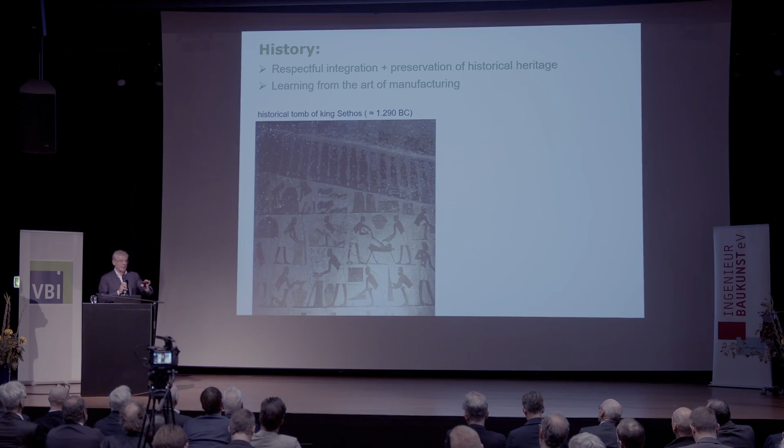We really tried to study carefully this procedure, how they made the different mixtures of mortars and so on, and what had been added, in order to understand a little bit better a possible restoration procedure.

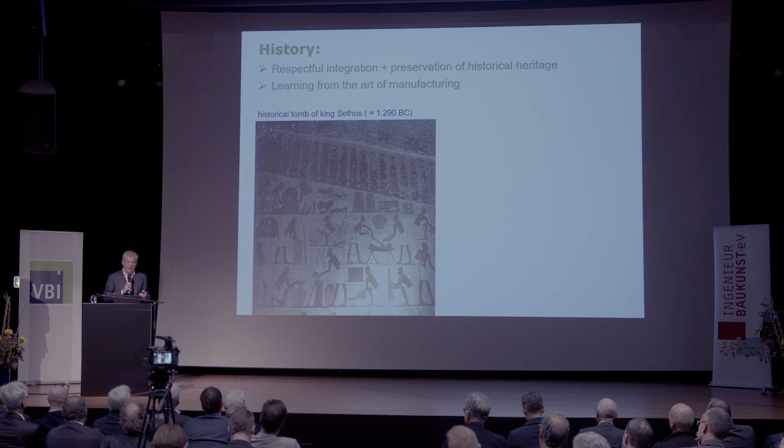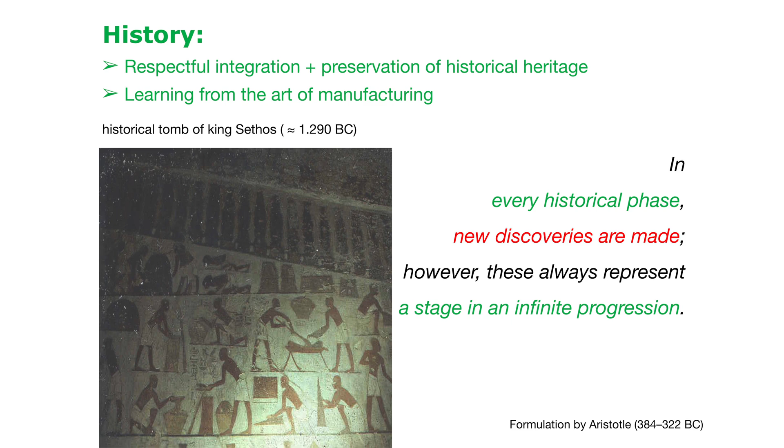Learning from history brings me to the formulation of Aristotle, one of my favorite philosophers. He said, in every historical phase, new discoveries are made, but however, all the time, it is a stage in an infinite progression. So we have only to believe that also the young generation will progress very well, and they will do very well. This brings me to the situation where we should go.

This image I got from Reinhold Messner, where we had the chance to design the huge glass roof on his castle years ago. The idea that stays behind all of this is that we have to keep going.

Trying to integrate also the historical, not only knowledge, but also experiences. I would like to point out what actually the president this morning, Professor Markus Hilgert, said, when he announced the so-called Lucius Fabricius Bridge in Roma. This very interesting bridge has a nice story behind it.

We call that bridge in Italy not Fabricius Bridge, but the bridge of the four heads, 'i quattro capi'. The story behind it is the following: in the 16th century, the bridge was in a very bad shape, and so they called some experts. In the literature you can read that they were architects, but I believe there were probably also engineers - four experts. And the four experts developed, by their own, four individual solutions, and they couldn't find any common solution in order to maintain the bridge.

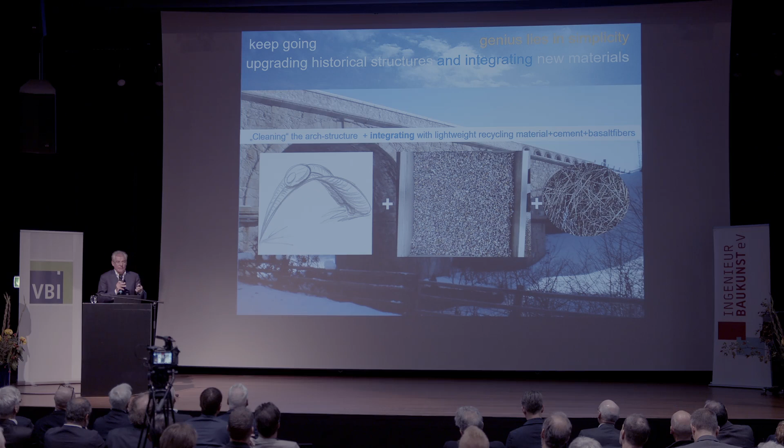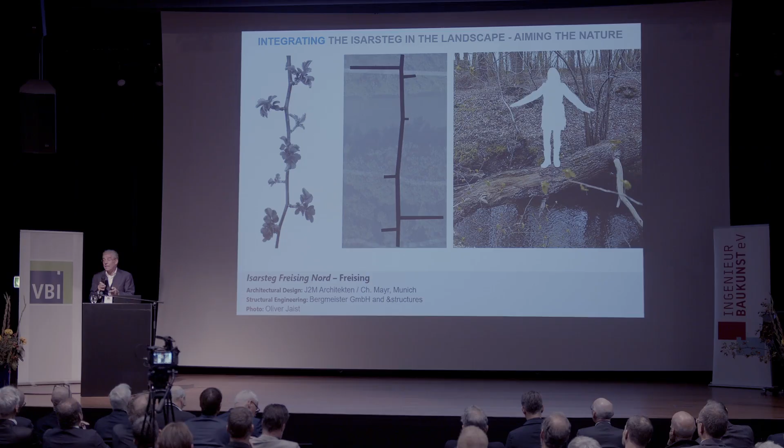Integrating our bridges and footbridges in the landscape is not only a scope, it is also sometimes a very interesting communication skill and task. We as engineers have to serve sometimes in a very modest way, as a modest servant, but on the other hand side, we must also be the enabler of very interesting ideas coming from designers, from architects.

This kind of footbridge was actually developed with the idea to create some organic element, and to shape that in a way that finally it turns out to be an integral bridge.

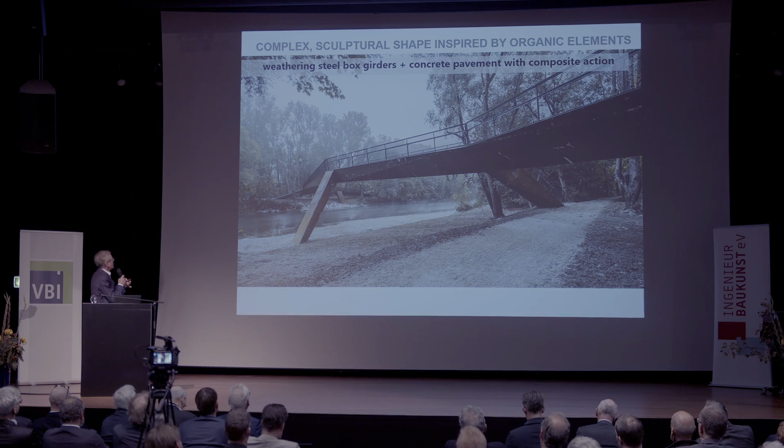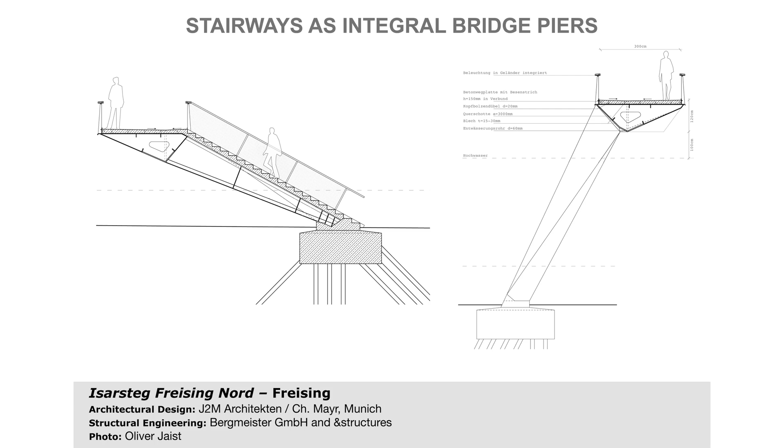We have been using the weathering steel box girder. The concrete pavement has been directly connected with headed studs to the steel structures, in order to have a structure which is quite simple in design, but nicely integrated in the landscape. The stairways have also been used as integral piers in order to activate the foundation.

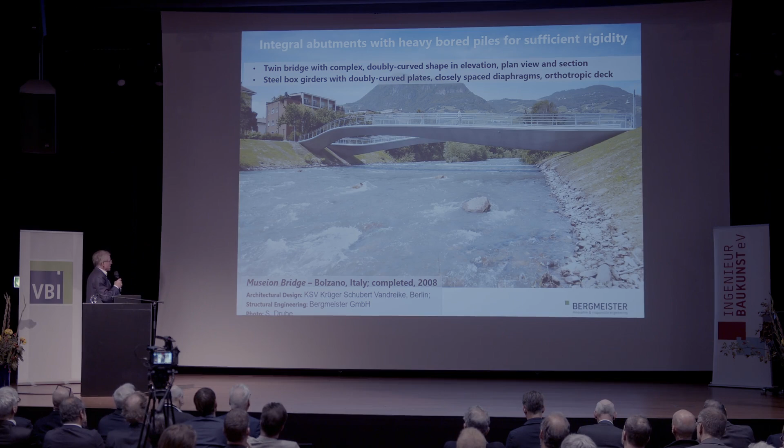Another example is the footbridge, bicycle bridge, designed by Krüger, Schubert, Vandreike from Berlin 15 years ago. This bridge connects two pieces of the city of Bolzano-Bozen: on one side the university, on the other some residential zones. So the idea behind was to create a nicely shaped bridge.

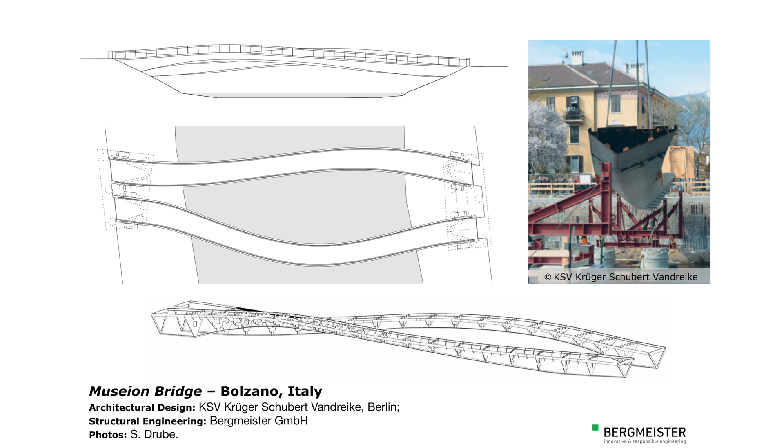Made out of steel box girders, we tried to integrate the soil into the structural behavior, developing an integral bridge which has a very interesting structural behavior. The situation with such a bridge is we always have to achieve a certain perfection by reducing as much as possible the volume, the masses, and additional joints and bearings.

By doing so, we designed a couple of years ago this Herzogsteg in the southern part of Germany. I would like to underline one very important task: the close collaboration with architects. We need them, and we have to find ways to work together in order to integrate the landscape and develop a bridge structure with very little maintenance.

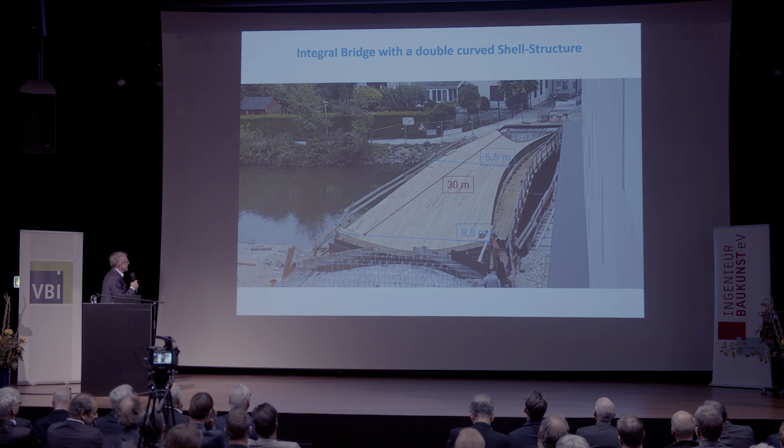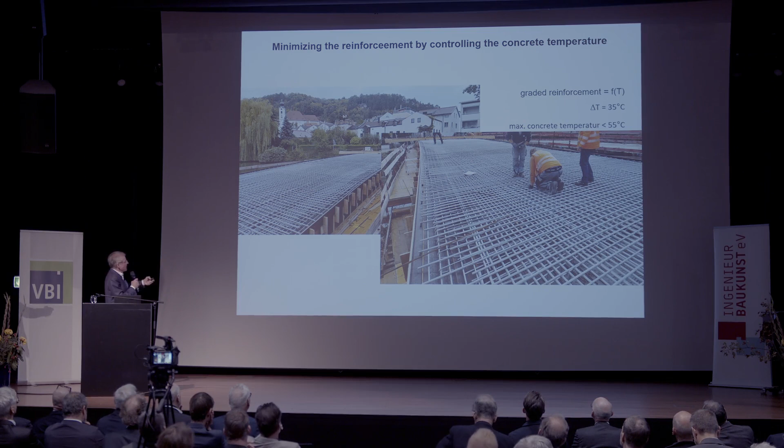This has already been pointed out, and the idea was to use a double curved shell structure, as Mike was pointing out yesterday in his presentation. We tried to minimize the reinforcement by controlling the concrete temperature. This sounds easy, but it's not an easy task when you really apply it by limiting the temperature difference.

We used some emission-low binder, and had to take into account the slower hardening, which influenced the construction process. The bridge deck has no additional pavement or asphalt. We used a deep hydrophobization promoted by the office Schiessl-Pecka, Sodeikat, Gehlen from Munich.

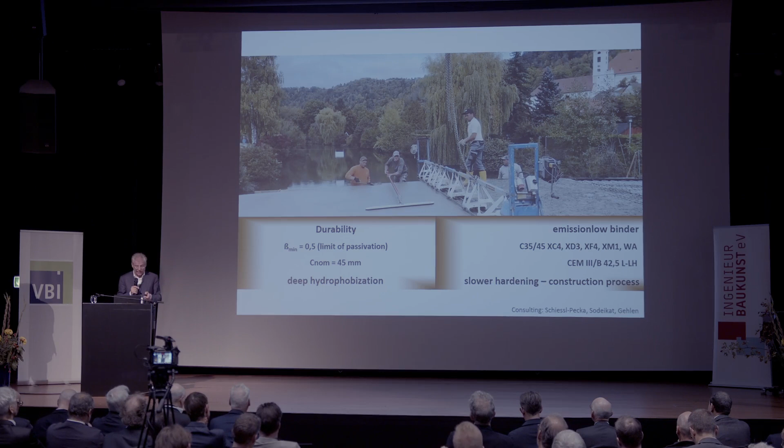This is an example of how, in a simple way, such an integral bridge can be inserted within the landscape, and on the other hand how simple it is to finally maintain this kind of bridge. The passive earth pressure also has to be taken into account, as shown in the following formula.

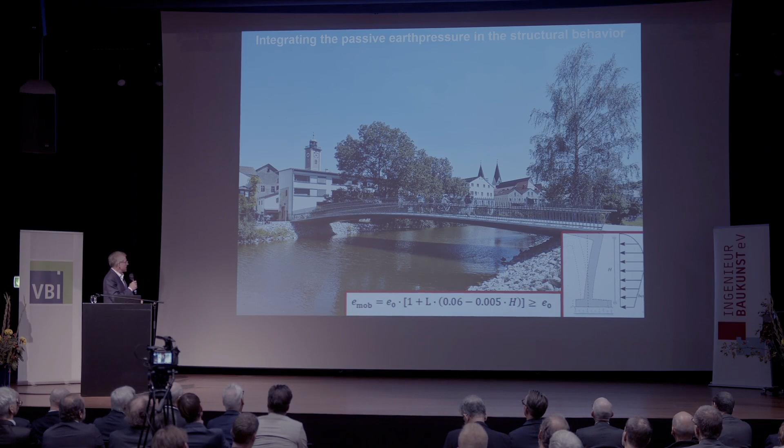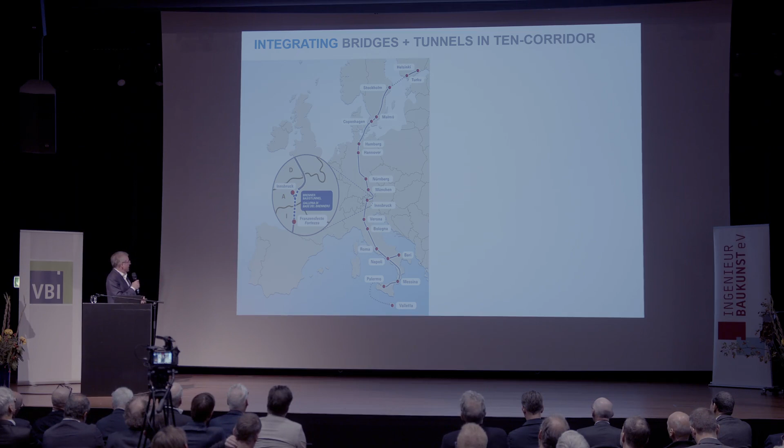I would like to come up with two more, slightly bigger projects. I was heavily involved in the past two decades in the so-called Trans-European Corridor from Helsinki to the island of Valletta, a corridor line of 9,000 kilometers. There are several important tunnels and bridges involved within this corridor, for example the Fehmarnbelt Tunnel.

I was personally involved as a member of a commission in the so-called suspension bridge Stretto di Messina, which I would like to mention only briefly, and I was heavily involved in the design, approval, and finally also the execution phase of the Brenner Base Tunnel.

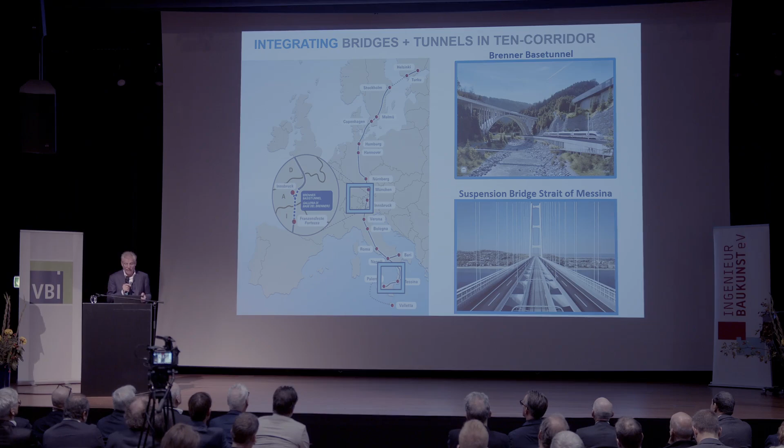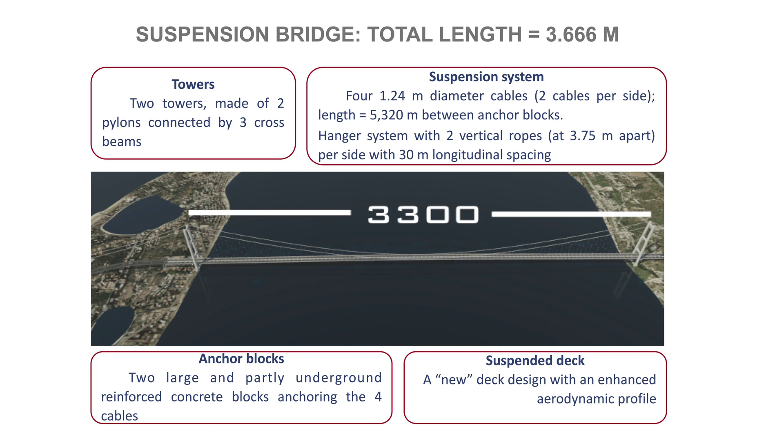Two bigger projects than the footbridges I showed before. This suspension bridge has a total length of 3,600 meters, but the length between the piers is 3,300 meters. We have two pylons connected by three cross beams, plus, as already pointed out, the four main cables with diameters of 124 centimeters, the anchor blocks and the suspended deck.

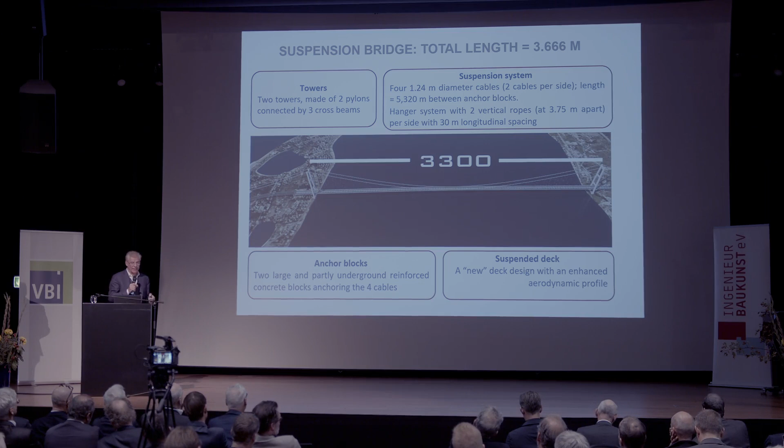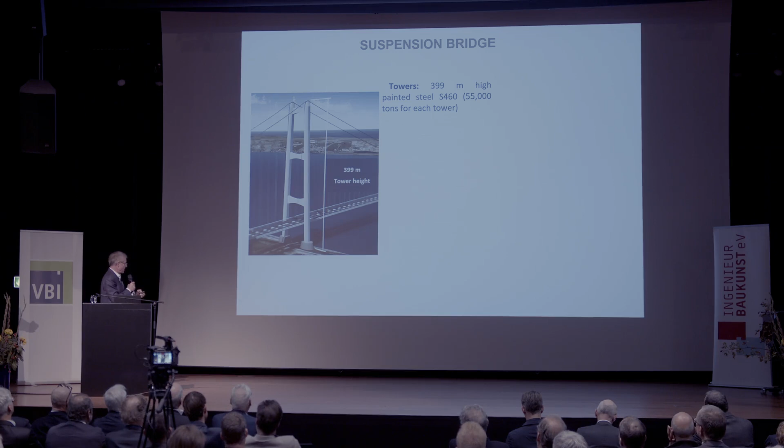There's a new deck design which is still an ongoing task in order to optimize it in terms of wind resistance and so on. The tower is a little lower than 400 meters, since this was a limit given by some code regulation. The foundation is not so difficult.

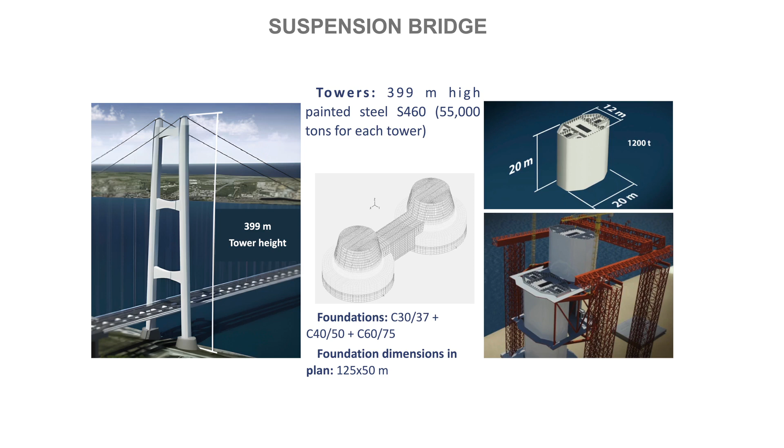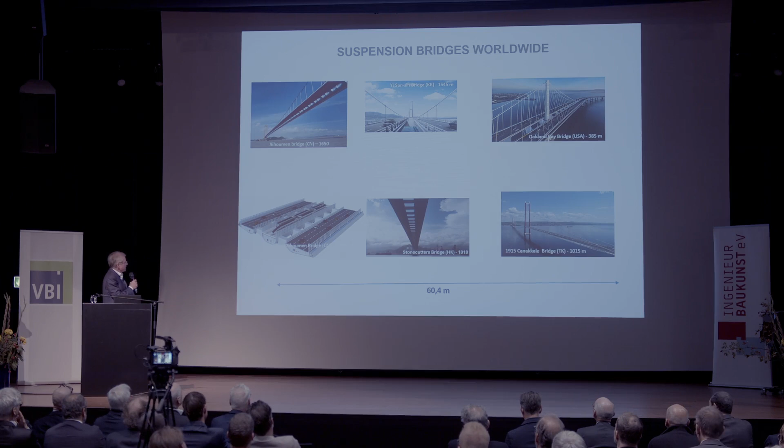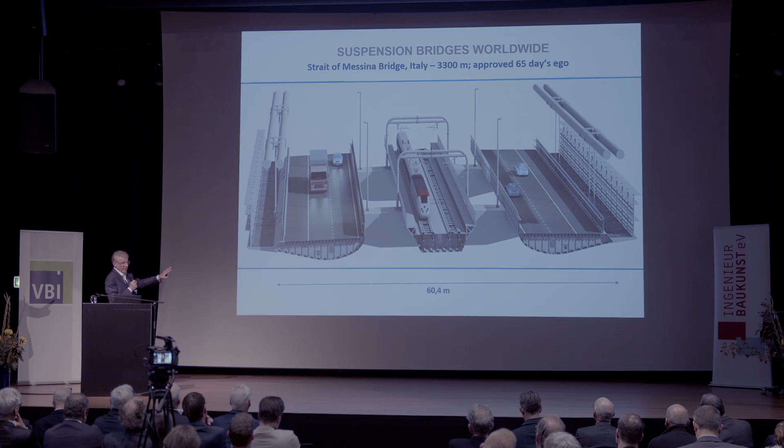The design is done by COWI Consult of Denmark, so different companies are involved in the whole design of this very important bridge. Suspension bridges worldwide are shown in these slides, but the new bridge, approved on the 8th of August, exactly two months ago, has a width of more than 60 meters, containing a railway line and two highway lanes on both sides, which should connect the island of Sicily with the rest of Italy.

The other project was the Brenner Base Tunnel, which should become the world's longest tunnel at 64 kilometers. It connects two countries, Austria and Italy, and both are members of the European Community with the same Eurocode, but nevertheless the complications were quite heavy.

We have 39 kilometers in Austria and 25 in Italy. To tell you one story: we have not been able to shift the highest point of the tunnel's slope in the center, since each country and government wants their own water resources. We have not been able to have the surface water go directly vertically and then split to the south and north.

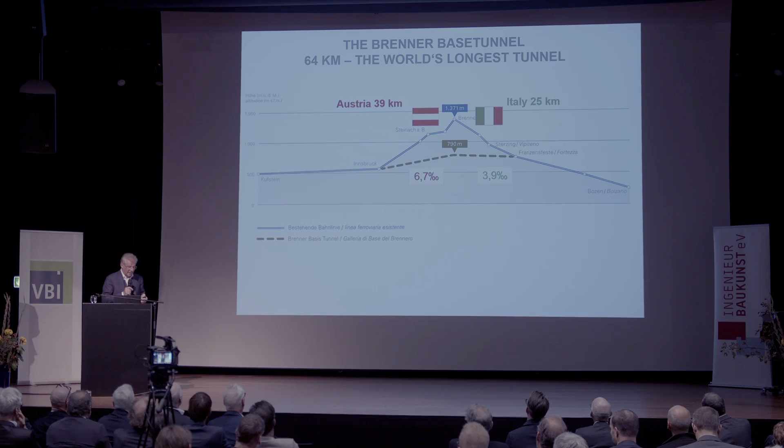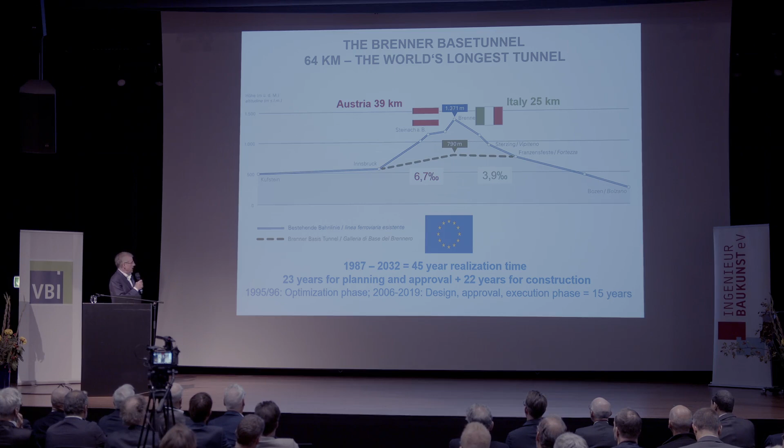We have not been able to change that after a couple of years. The story started in 1987, and I was involved between 1995 and 1996 for the optimization phase, responsible for that, and finally 15 years for the design approval and execution phase for half of the tunnel. 45 years of realization: 23 years for planning and approval, and probably 22 years for construction.

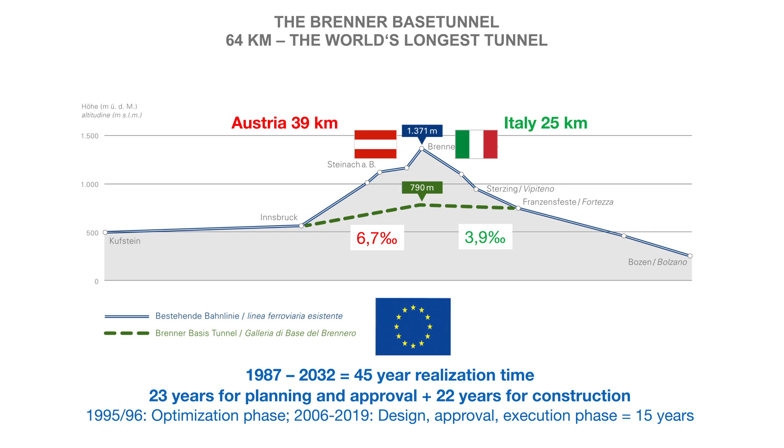This is our reality. Now the tunnel has 3 emergency zones with 3 exits in order to subdivide the tunnel into 3 pieces, none longer than 20 kilometers. These are some emergency constraints.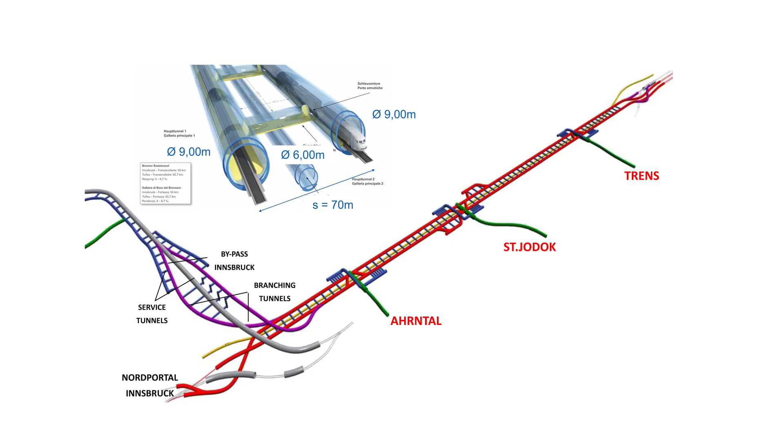There are 2 main tunnels, 9 meters in diameter, and in the middle an exploratory tunnel with a diameter of 6 meters. The exploratory tunnel broke through exactly 3 weeks ago, on the 18th of September, and now we have a continuous situation between the two countries.

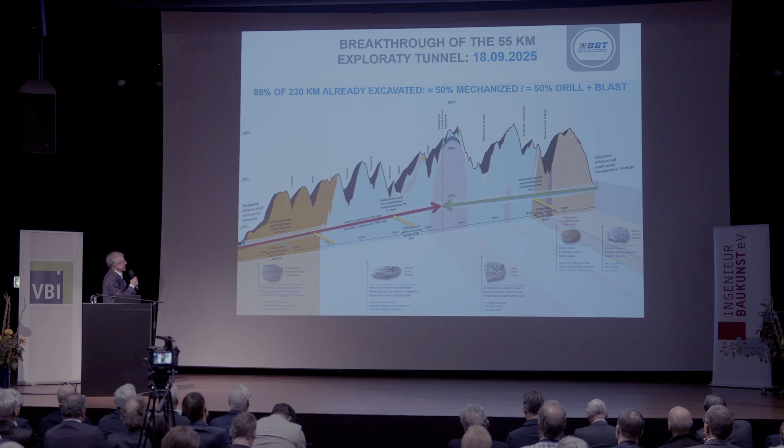50% has been excavated mechanically with TBMs, and 50% using cast-in-place methods with drill and blast, using explosives. This is still an art - how to place the explosives in the right way in order to avoid a lot of overbreaks is not an easy task. It is still a manufacturing task.

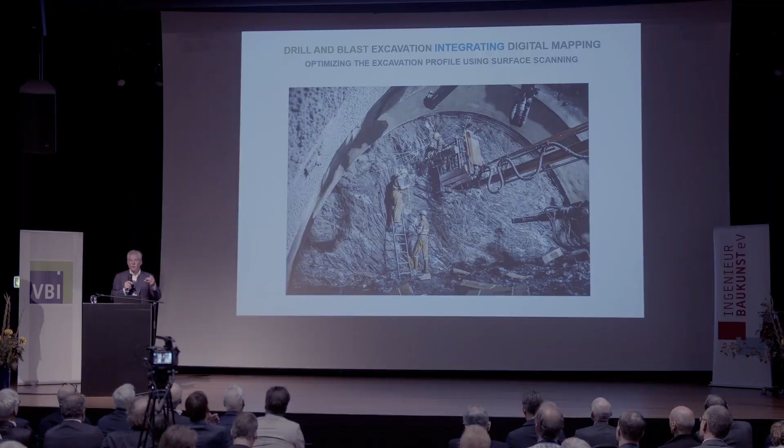On the basis of what I saw there, we tried to develop, using digital scanning, a methodology for how the internal surface could be scanned, and on the basis of historical data and geological information given daily, we developed an algorithm to do the prognosis for the next upcoming 3 to 5 meters, in order to place the explosives in the right way.

What were the steps? First we had the geological documentation and information. We took digital images using laser scans, LiDAR, and mobile camera images. We developed an algorithm using probabilistic analysis and statistics - with enough data we trained the model and found a certain percentage, which allowed us to optimize the drilling scheme based on historical data and the information given by the geologist.

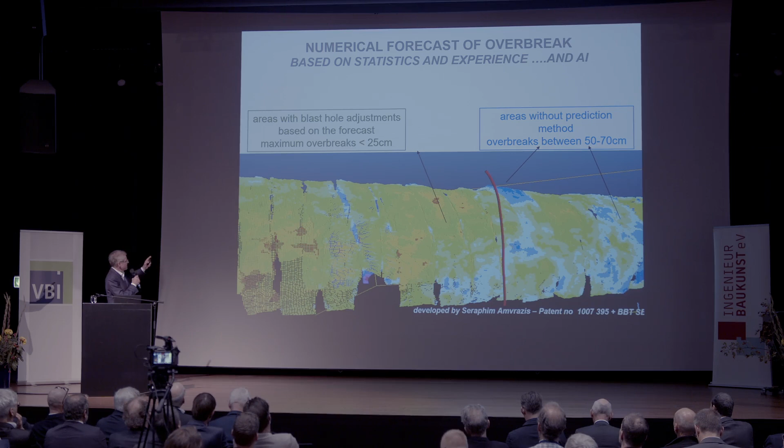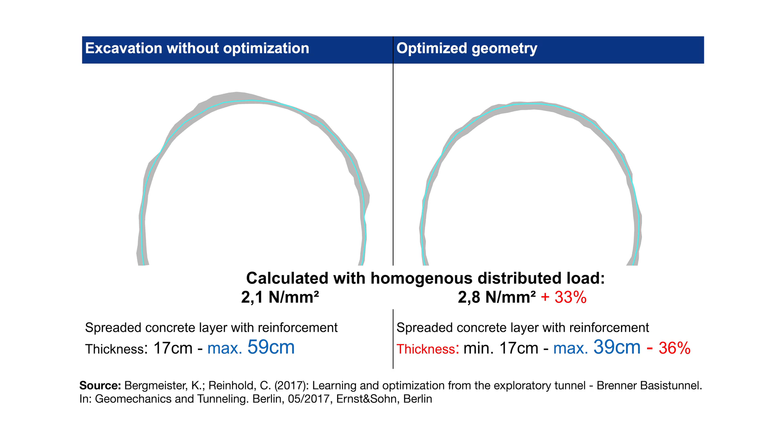The outcome was that we reduced the maximum overbreaks by 65%, which also had a positive impact on the structural behavior - it's a shell structure, nothing else. Using a very simple approach, the calculated homogeneous load could be increased by 33%, but more importantly, we were able to reduce the thickness by 36% using exactly this approach.

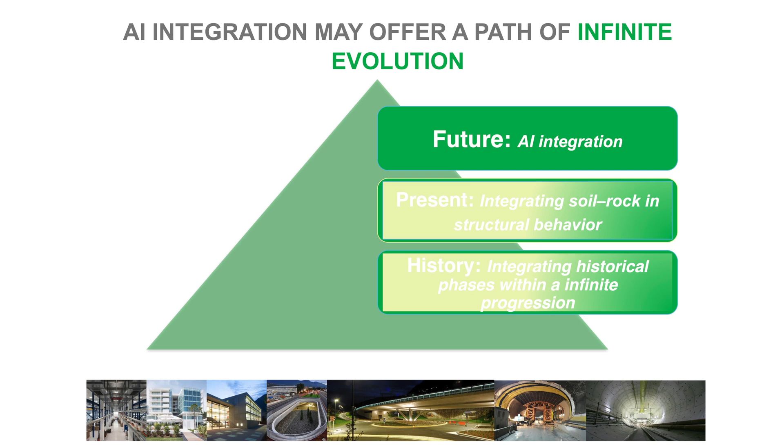Now I'm coming to the end. The last task shows us some idea about the integration of artificial intelligence. I'm not an expert, I would like to give you only one small example. We know already this kind of bridge, we saw it before. A couple years ago we had the challenge to design, together with two architects, Bachmann and Stifter, this hut up in the Alpine regions at more than 3,000 meters, and we were responsible for the whole engineering design.

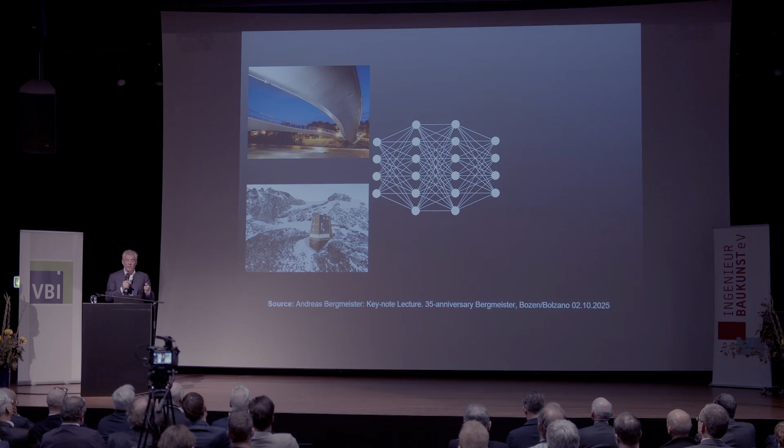But through artificial intelligence, you can combine those two issues, the landscape of the Alpine zone with the bridge construction. If you do so, it comes out as a combined situation where the very nicely designed bridge has been inserted within the landscape in the snowing Alpine zone.

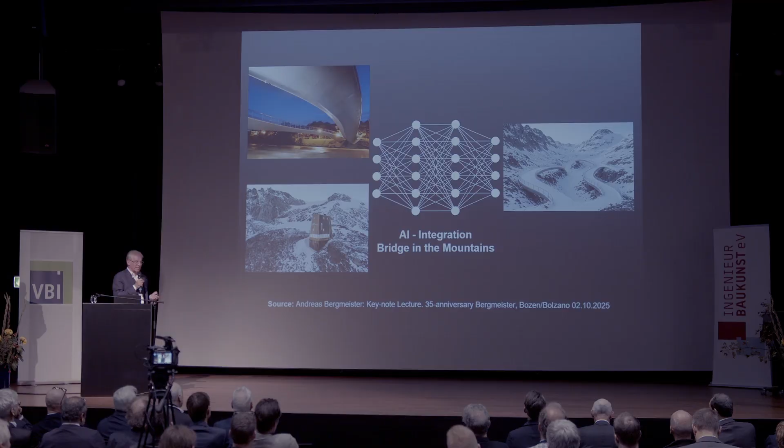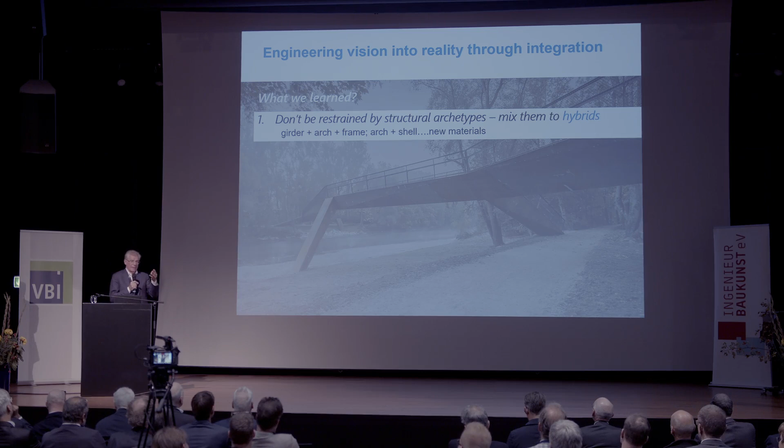And coming to the conclusion, the engineering vision into reality through integration was my main topic. What did we learn? First of all, we have to be open to different hybrid solutions in terms of structural systems and in terms of materials.

Secondly, we have to integrate in a very respectful way historical heritages and historical structures. We should learn from the art of manufacturing what they did in the past, also by using printing and new technologies.

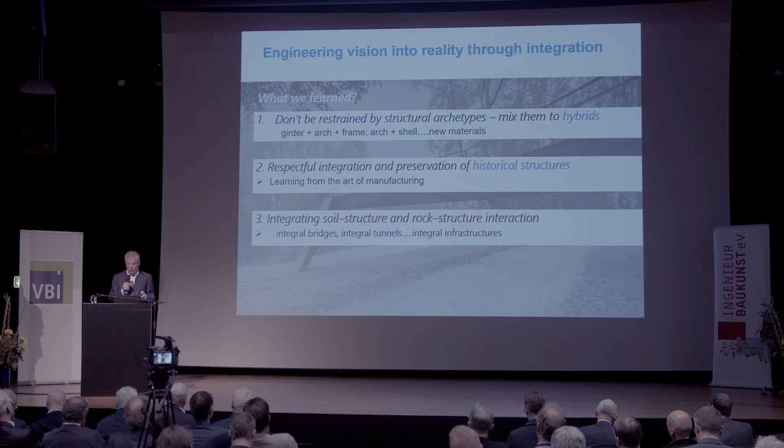Finally, the soil, the rock is there, and so we have to use it in an integrative way, trying to integrate as much as possible the soil structure situation. And finally, AI can help us to transform some visions into engineering reality.

This brings me back to Aristotle, with whom I began, since he said if you would understand anything, observe its beginning and its development. Ladies and gentlemen, dear Mike, I would like to thank you so much. You are the inspiring ambassador of the Baukultur. Thank you, and thank all of you.

Thank you very much for so much interesting thoughts we got in your lecture. Would you like to add, to ask something, to comment a thought? We got a nicely summary, yeah, to everything. Yeah, thank you so much for the very informative presentation. It was really nice.

The Messina Bridge, I think, is a project whose original idea is from really early, and I think the biggest plans were in the 1930s, but it was never completed because it was so complex and so enormous. What makes you optimistic that this bridge will indeed be finished and will be a success?